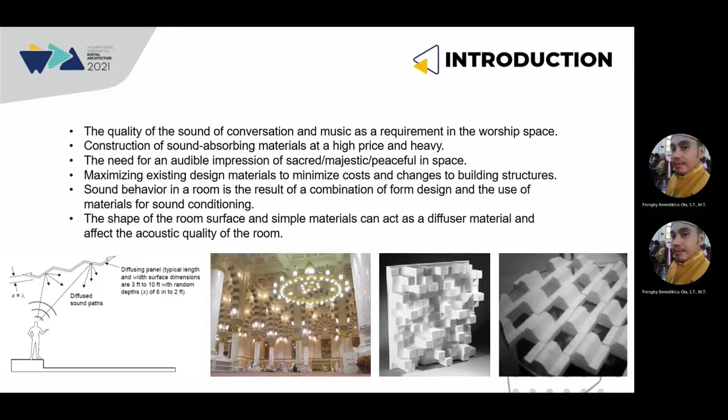One of our ideas is how to maximize existing design material to get a good acoustic quality for both music and speech. The behavior of sound in the room is not only determined by the sound system quality, but also by the shape and materials in the room. So we try to utilize material in the existing design that is also able to function as acoustic material, especially as a diffuser material, by modifying the shape of the interiors and material arrangement.

From the problem of the price of sound absorbing materials, the problem of the building being under construction, as well as the need for certain acoustic qualities, the purpose of our research is how we can utilize existing design materials by processing the shape and arrangement so that they can function as diffuser material, and what the level of improvement in sound quality in the room is when compared with using dominant sound absorbing materials.

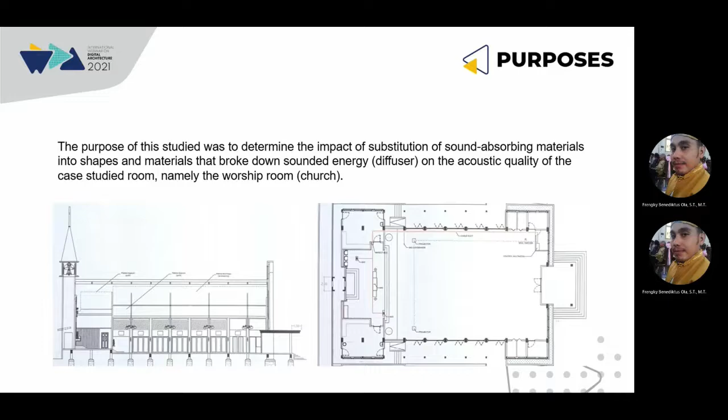The research method section is divided into four sections. First, we took data by observing the design drawing documents, conducting a field survey, as well as discussion and interviews with the church building committee. Second, we use the simulation method using CATT-Acoustic software to see the acoustic quality of the model we are going to test. Our model is divided into three types.

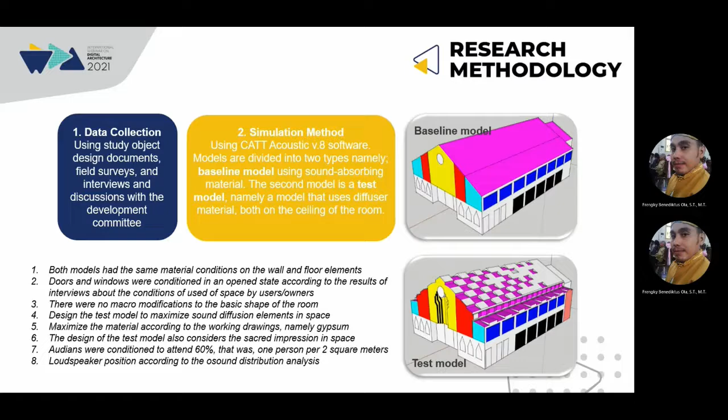The first is an existing design model. Then there is a baseline design model where we use a dominant sound absorbing material. The third is a test model where we use the dominant shape and diffuser material, and some provisions related to the condition and setting of the simulation can be seen in the description below.

At the analysis stage, we use a comparative study. We compare the baseline model and the test model, where the values we compare are room acoustic parameters, such as sound intensity, reverberation time, speech transmission index, definition, sound clarity, stereo impression, and sound warmth in the room.

Conclusions are drawn in two stages. First, we look at the achievement of the test model on the acoustic parameters of the church room. Second, we look at the achievement of the test model against the baseline model. The first conclusion is used to see whether this sound diffusion technique can improve the sound quality in the worship room. The second, a comparison with the baseline model, is to see if this technique can be used as a substitute for the dominant use of sound absorbing materials in the room.

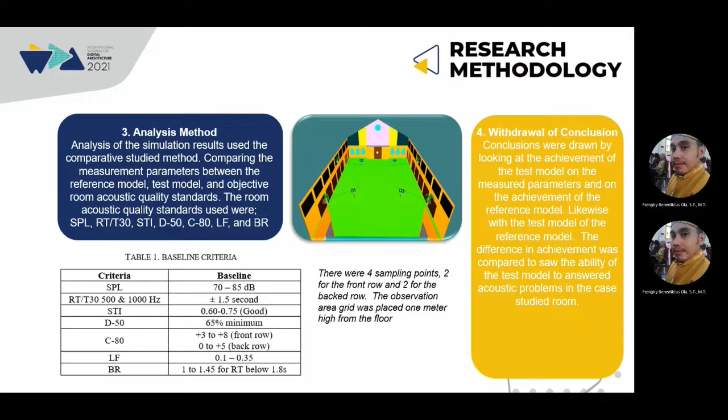We group the comparison of our simulation results. First is a comparison of the reverberation time value. The result shows that there is no significant change between the baseline model and the test model. A difference of 0.3 seconds only occurs for the audience in the back row, especially at 1000 hertz. This is assumed to occur because the form of space diffusion we use is likely to break up more sound energy at 1000 hertz. Overall, the use of materials and form in sound diffusion has a positive impact in improving the reverberation time when compared to the existing design.

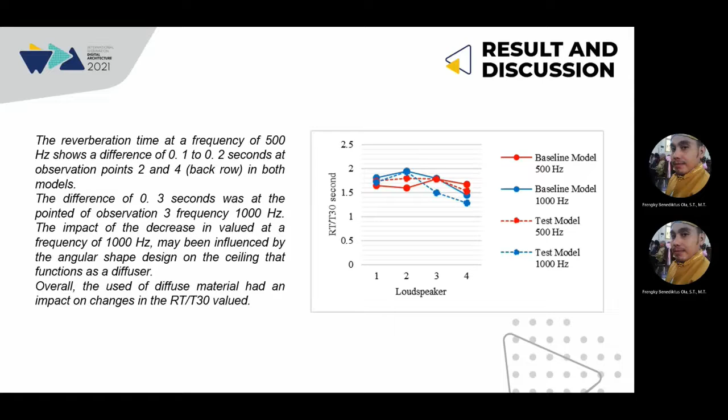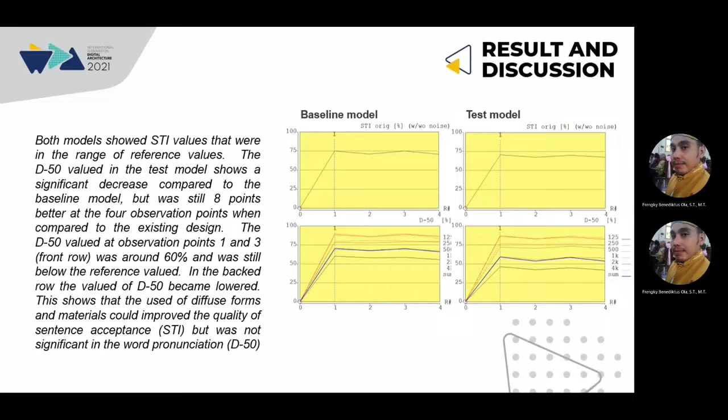The second comparison is on the sound quality of sentence and word pronunciation. Both models show speech transmission index values still within the applicable standard parameters. But the definition value of word pronunciation of the baseline model still shows a much better result than the test model. The test model shows a lower value than the reference parameter value, so it can be concluded that the sound diffusion technique is able to improve the quality of sentences, but does not provide significant improvement to the clarity of word pronunciation.

On the sound quality of music, both the baseline model and the test model show results that meet the standard parameters for the audience sitting in the front area. However, for the audience sitting in the back area, the test model shows a better result than the baseline model. This is because in the baseline model the back wall and the ceiling in the rear area all use absorbent material, so sound energy is absorbed more quickly. While in the test model, because it uses a combination of absorbent material on the wall and diffusion material on the ceiling, the reverberation sound lasts a little longer, giving the impression of lively music.

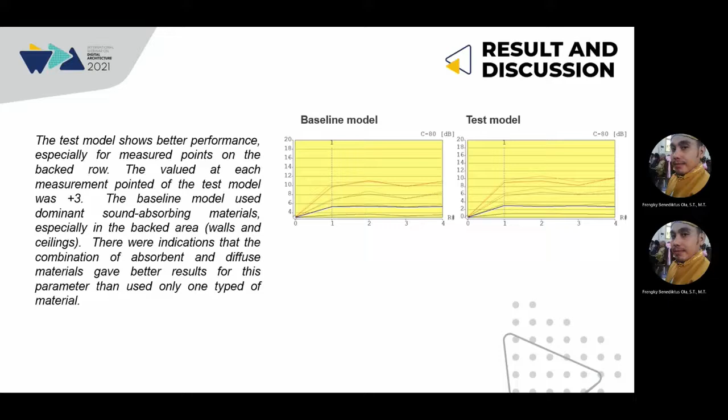The last parameters, related to stereo impression and sound warmth, show that the test model gives a better stereo impression and sound warmth than the baseline model. This is because the slightly higher reverberation time value has an effect on the bass ratio value, while the use of materials that break down the sound energy on the walls of the room provides an opportunity for side reflections to occur, which give a stereo impression.

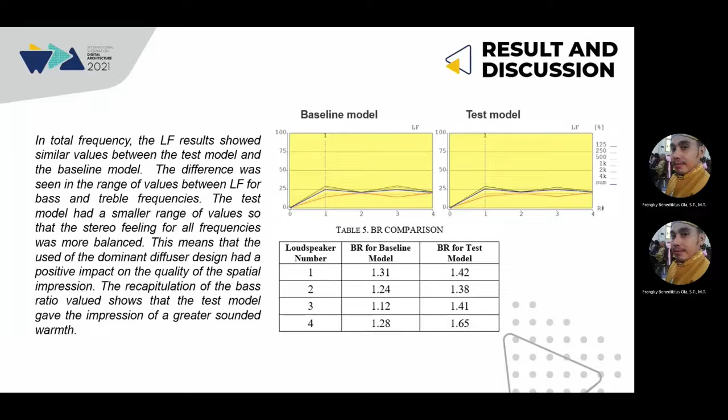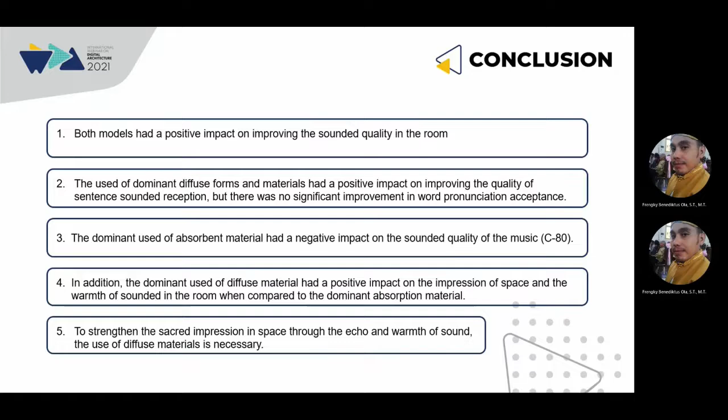Fourth, using a dominant diffuse material gives a good impact on the impression of space and sound warmth when compared to the dominant sound energy absorbing material. Lastly, to strengthen the sacred impression through the acoustic quality of a livelier and warmer space, the use of diffuse material is important in the acoustic design of the worship space. Here are some references that we use.